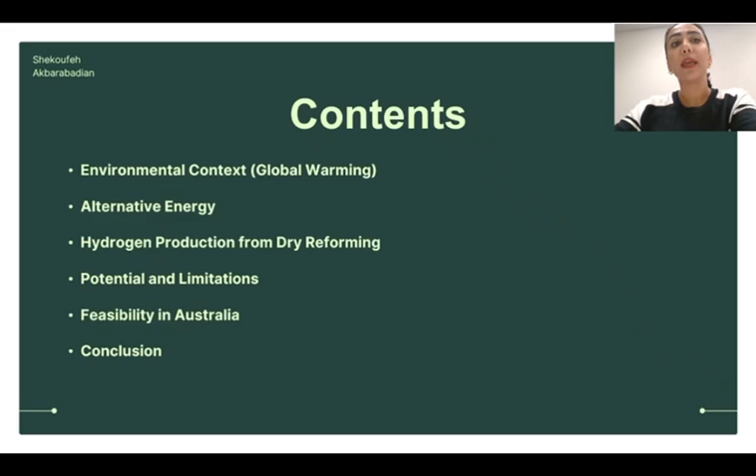Today, I'm going to talk about hydrogen production from dry reforming. Our speech includes 6 parts. First, I will introduce today's environmental problem, global warming. Second, alternative energy. Third, hydrogen production from dry reforming. And then potential and limitations, feasibility in Australia, and at last, conclusion.

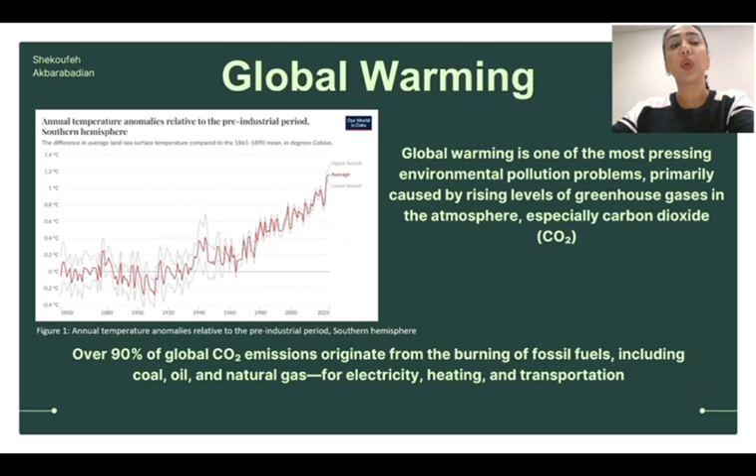Okay, let's start with global warming. In today's societies, one of the major environmental problems is global warming. The main cause of this is carbon dioxide emissions. Most of these emissions come from burning traditional fossil fuels like coal, oil, and natural gas. To reduce this problem, we need alternative and several types of alternative energy sources.

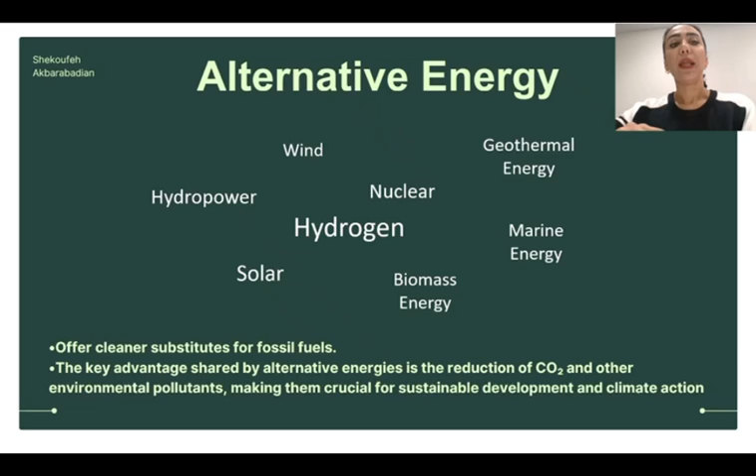Some common examples are solar power and wind energy. They are mature, but they depend on weather conditions, and the biggest challenge is their instability. Other energies like hydrogen, hydropower, and nuclear energy are potential, but still in the developing stage. We could find that all of them have one big advantage. They produce less greenhouse gas compared to fossil fuels, which helps to protect our environment and build a sustainable future.

Among all of these clean energies, hydrogen is receiving particular attention in Australia because of its abundant renewable resources and strong government strategies and the ambition to become a leading global exporter of clean energy. So far, electrolysis still remains the dominant approach compared with others. However, dry reforming as an emerging technique may prove particularly suitable for Australia.

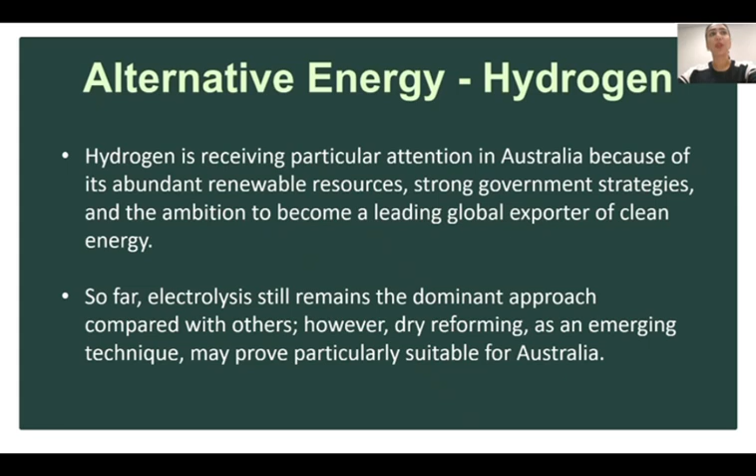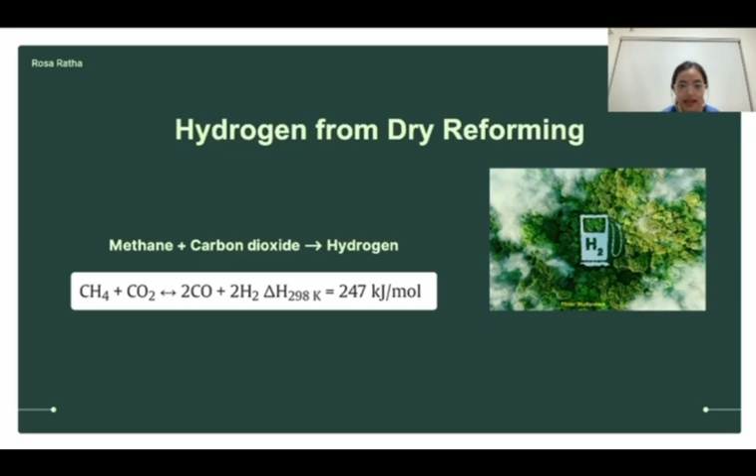Hi, I'm Rosa. So let's talk about hydrogen production from dry reforming. Dry reforming is a very potential method used to produce hydrogen from natural gas. The formula is shown on the slide as you can see. Dry reforming involves the reaction of natural gas such as methane with carbon dioxide, and it produces syngas, which is a mixture of carbon monoxide and hydrogen. Of course, a catalyst and heat are needed in this production, and in this case, the catalyst is nickel.

This initiative is still in an early stage where the idea is being formed and critically analyzed for its feasibility in Australia. According to the research by Hunter, Huang, and Jiang in 2025, the Middle Arm region in the Northern Territory is an ideal location for dry reforming hydrogen production because there's an abundance of methane from offshore gas fields, and the existing ports and transportation infrastructure is an advantage to this new production. It is also backed up by the government's initiative, such as the Northern Territory Government's Middle Arm Sustainable Development Precinct Initiative.

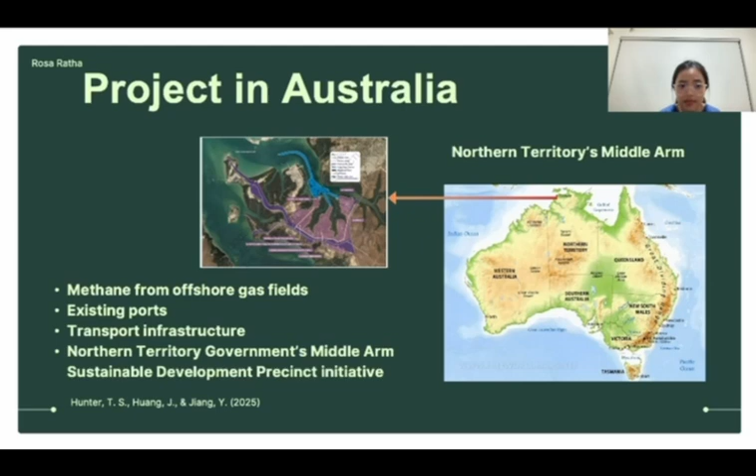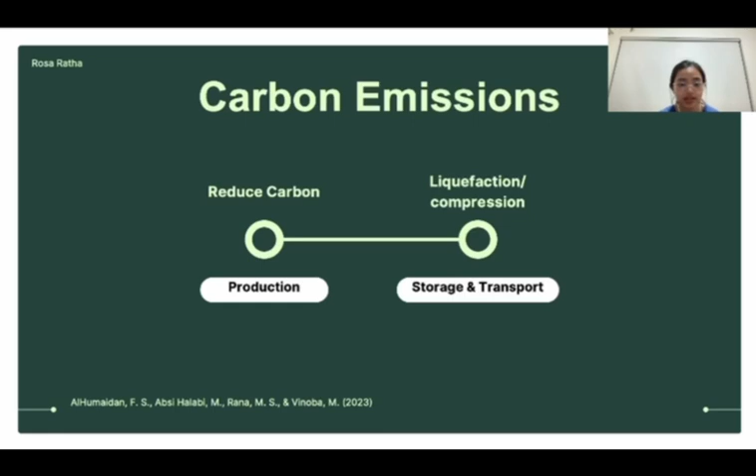The life cycle analysis of hydrogen production from dry reforming is still limited, as this is still a new technology. However, with the existing literature, we can draw conclusions that in the production process, carbon dioxide is actually reduced from the atmosphere rather than emitted. And the critical point is storage and transportation that needs to be considered, such as by hydrogen liquefaction or compression to reduce carbon emission with efficient transport.

Thank you, Rosa, for introducing hydrogen from dry reforming and the project in Australia. Now, let me show you the advantages and the limitations. The first one is no water needed. Dry reforming of methane does not use process water, so it can suit Australia's dry regions. And it also uses CO2 on site. At the gas processing hubs, we can feed the captured CO2 into the reactor. So there's less venting and less transport.

The third one is small land footprint. We plug into existing liquefied natural gas areas and reuse steam methane reforming people and equipment. That cuts upfront cost and saves time. The fourth one is flexible products. DRM makes syngas, a mix of H2 and CO gas. We can turn it into methanol or FT fuels instead of burning the CO.

What about the limitations? The first one is not zero carbon by itself. If we burn the CO or run WGS without CCS, the CO2 goes back up the stacks. It also needs very high heat. It needs about 600 to 800 degrees; without low carbon heat, costs and emissions go up.

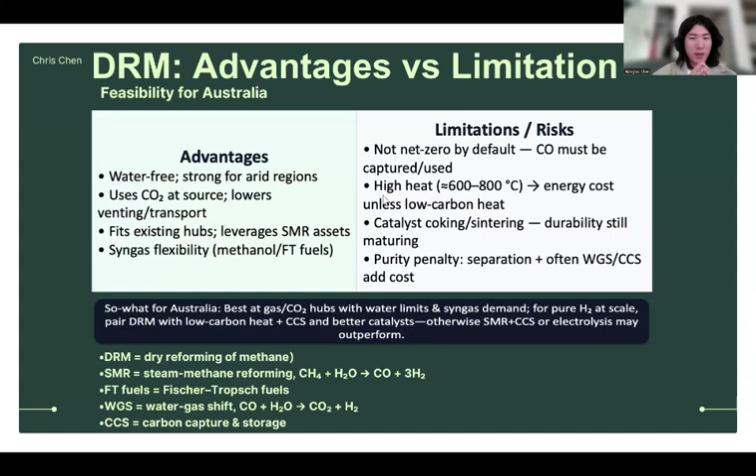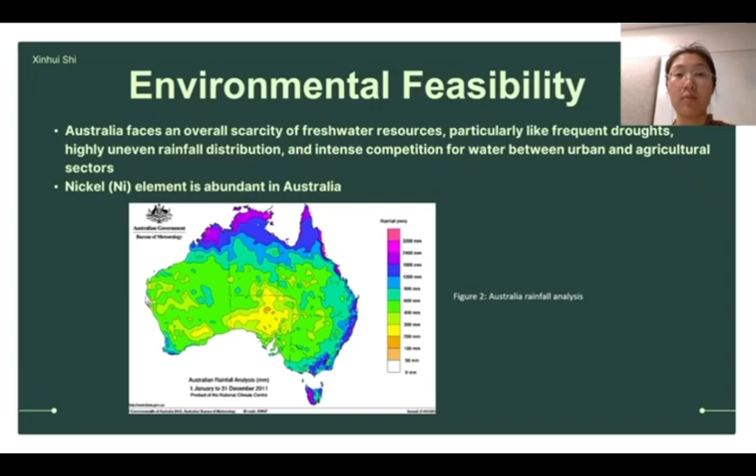Thank you, everyone. Now, my group mate Xinhui Shi will introduce feasibility in Australia. Hello guys, I'm Xinhui. Now I'd like to talk about the feasibility of this technology in Australia. So before this, I think we need to learn about the environmental characteristics of this land. Australia is a freshwater-scarce country, and in this land the nickel element is abundant, which means if we want to develop or fund new hydrogen production technologies, we need to consider these two constraints.

So in this page, I list the former hydrogen production technologies, including electrolysis and steam reforming, to compare with dry reforming. We found only dry reforming has no need to use fresh water. And the catalyst material also uses the abundant element nickel in Australia. But one critical problem is the hydrogen production is relatively low, only 24 to 30%.

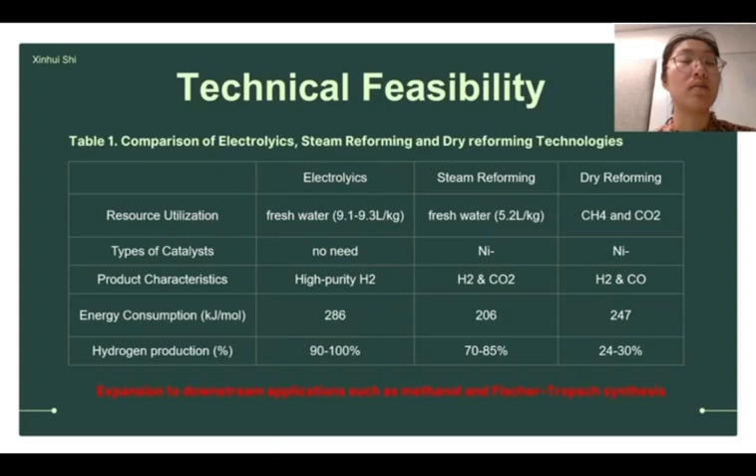We found in other papers, they indicate so far this technology is mainly used in downstream applications, such as methanol and FT synthesis. So if we want to improve the hydrogen production, if we want to get more high-purity hydrogen, maybe we need to update the performance of the catalyst.

But unfortunately, according to our investigation, in Australia there are only 16 steam reforming plants used to produce hydrogen. So if we want dry reforming to become large scale, maybe we need to wait several years. And in the future, scientists need to think about how to develop more efficient and carbon-resistant catalysts, and how to integrate with carbon dioxide capture and purification technologies.

And the last one is my point of view, maybe not right. I think this technology still relies on traditional energy, because as we mentioned, the methane comes from natural gas, but natural gas now belongs to the traditional energy, right? So if we want to use alternative energy, not only because they are clean, but also because they could provide sustainable energy, maybe in the future we need to think about how to collect them in a sustainable way.

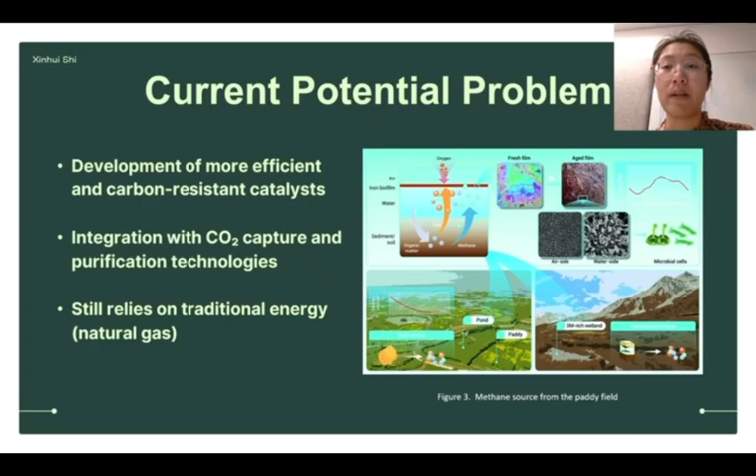In the end, I will give you a quick conclusion. Dry reforming is not very mature so far because of the low hydrogen production. But it can be regarded as a promising way because it could mitigate two types of greenhouse gas. And so far, this technology can be utilized in downstream chemical processes. If we want to use it to produce more hydrogen, maybe we need to enhance the throughput or update the catalyst.

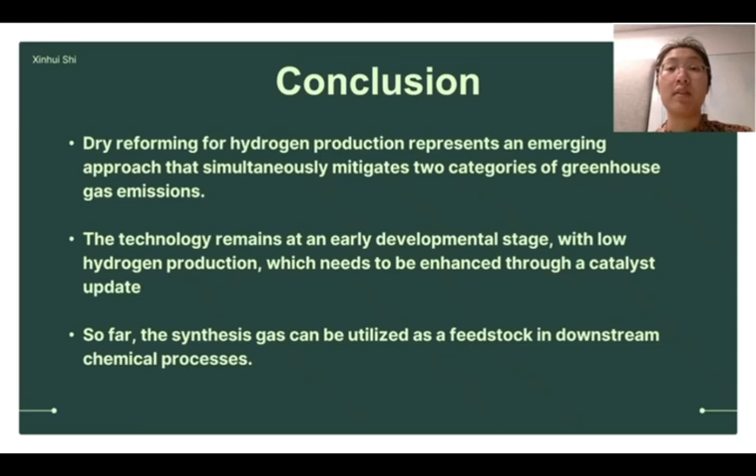Thank you for listening. This is our presentation, and these are our references.